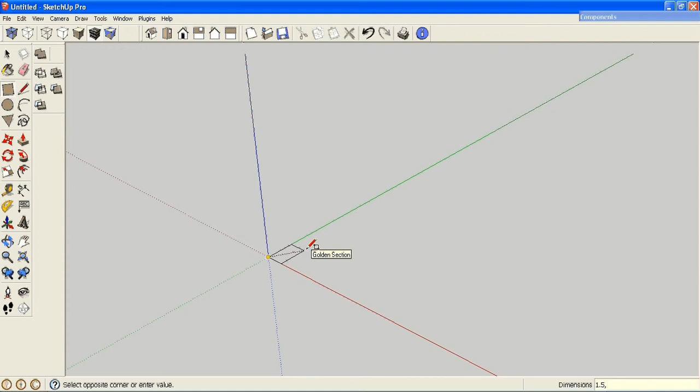So the first thing I want to do for this sensory table is create the legs. Now there are four legs. When I did this, I created this out of just spare 2x4s that I had laying around. So the first thing you want to do is create the leg. Now these are 18 inches in height by 3.5 by 1.5.

As you know, dimensional lumber is never exactly what it says. So a 2x4 is actually 1.5 by 3.5, or they call it 6/4 for 1.5 and 14/4 for 3.5. That's just, if you do it by quarter inches, it makes a whole lot more sense. So I created this 18-inch leg here.

The first thing I'm going to do is make this a component called a leg, so that anytime I want to change this component, all I have to do is change one of them and it changes all of them.

Next, I'm going to create a different leg. All you have to do is say move and then hit the control key. And I know that this one is going to be about 10 inches wide, so it should be 10 inches from here to there. So it's 8.5, so I know I need to move it the right dimension.

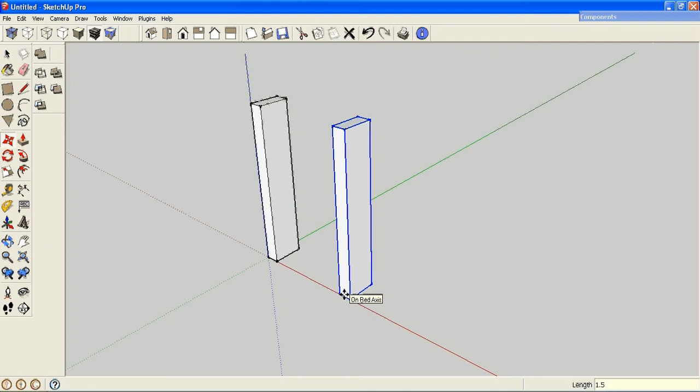So now it's 10.5. And then what I can do from there is take both of these legs and just move them out this way, hit control again. Now this will be 12.5 inches from that, and the dimensions I'm using for this I actually got from the water bucket or the sink bucket that I'm using to create this, and I just got it out of the kitchen sink. So I believe that's 7 inches.

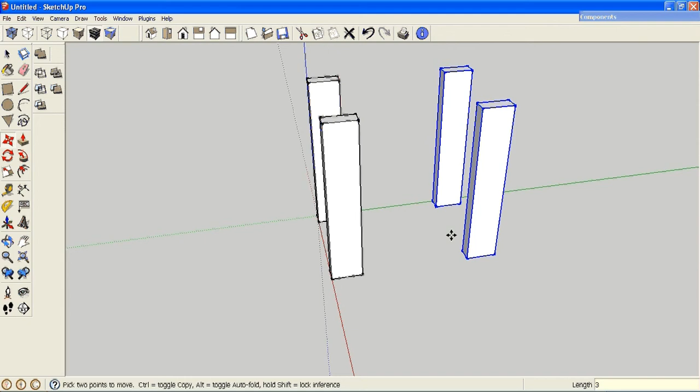Oh, that's wrong. I want that to be 6 inches. How far is that to there? Oh, I need another 3 inches. As you can see, that's pretty easy just to move it. So that should be 1.5 inches, and this is 10 inches.

Okay, and so there you have the four legs.

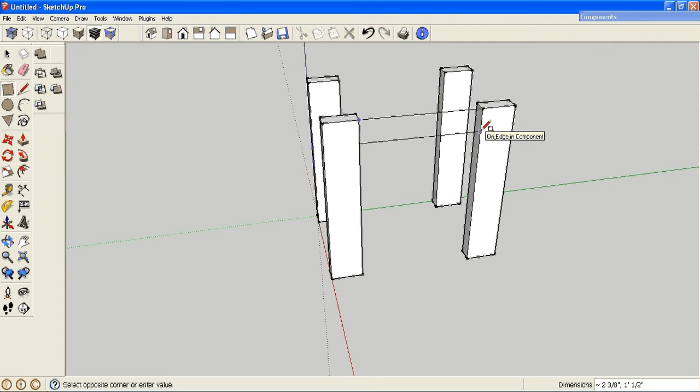Next, what I want to do is create the sides, and I know this needs to be 12.5 inches by 3.5 inches. So I'll create the rectangle, 12.5 by 3.5. You'll do 3.5 and then 12.5, and that will create that side of that leg. Use the push pull tool just to pull this straight in there, and then you have another side.

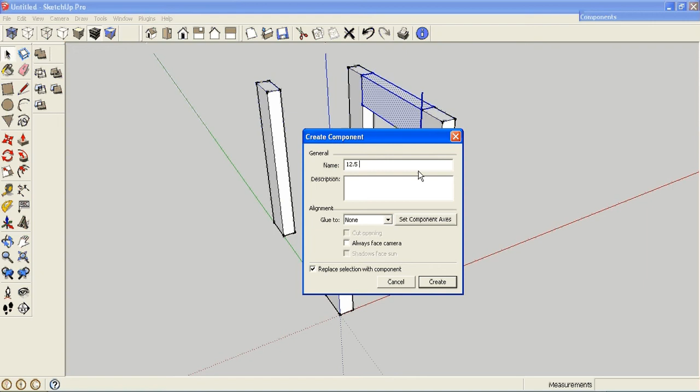So this one I'll call the 12.5 side. Then you can move this one over, just hitting the control key again, line it up, and it goes that way.

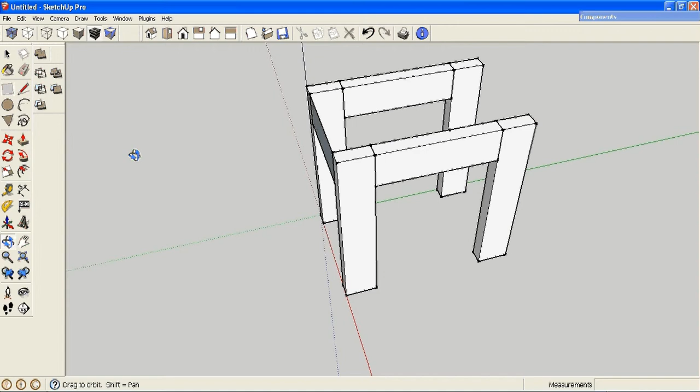Next, I want to create the sides for here, so that'll be 10 inches by 3.5 inches. Then this will stretch out 1.5 inches, or 6/4. So this one I'll make a component as well. That's the 10.5 side.

Good enough. And I'll do the same thing there. I'll just grab it from here so I can bring it all the way down. And that's basically all that you have to do.

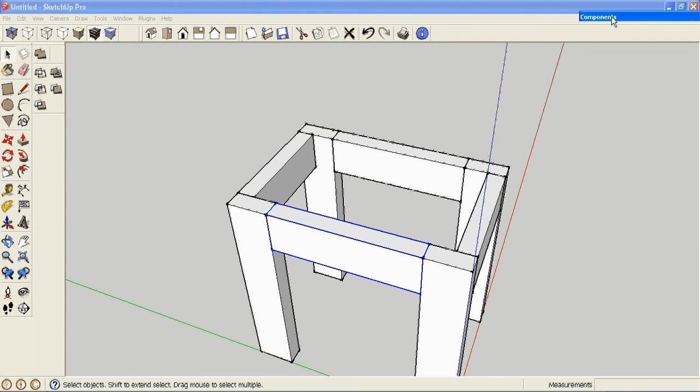Now I want to talk a little bit about the joinery in this. This is a pretty simple project; it's only 8 pieces of relatively short wood. The first time I did this, I did it with a pocket joinery system. You can also do mortise and tenon. You can just glue it. There's a wealth of things that you can do to do this. It just depends on how much money and how much time you want to put into it.

I find that the pocket jig system is just the easiest way to do it. I want to show you quickly how you can.

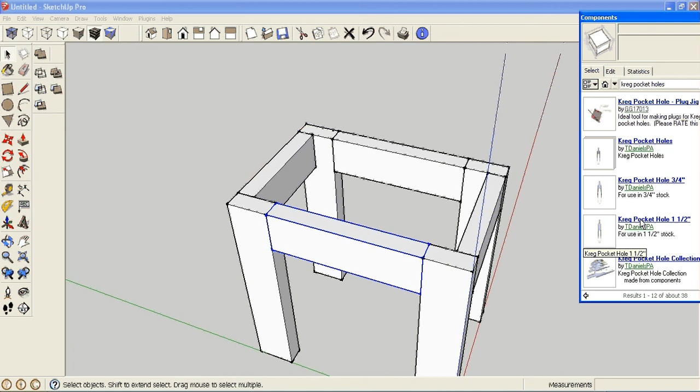So these are the pocket holes for 1.5 inch. You just click on it and it'll bring this up. You say download model directly into it, yes I do. And what you can do is just, if it'll cooperate, rotate this into the model the way that you want it, and move it wherever you want it.

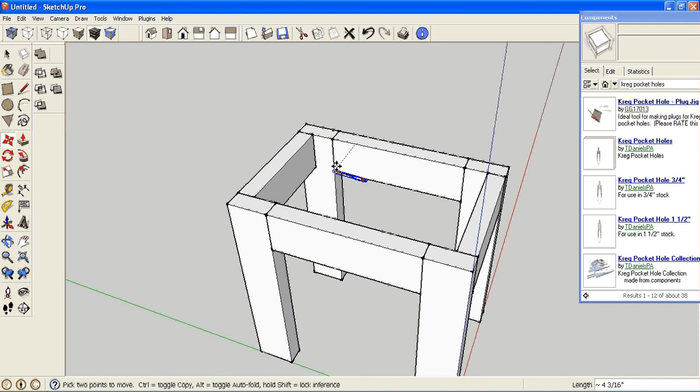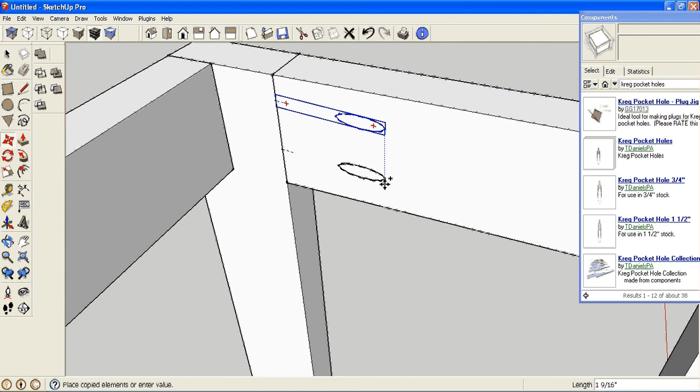So I'll just do one in the middle here and then move it. This is a 3.5 inch, so I know it's 1.75 inches, so I'll just move it up 1 inch, and that way it'll be 3/4 from the side. Then I can add another one to the bottom. You can just put it basically right—1.5 will be pretty much the same distance from there.

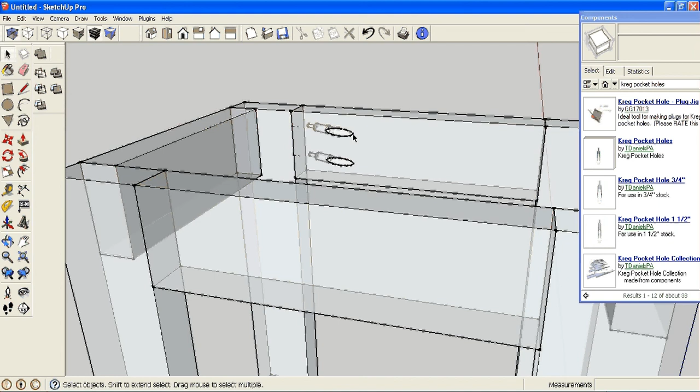And if you look at this through the wireframe in the upper left hand corner, you'll actually see how the pocket screw goes into there, and you can kind of understand how the pocket jig works. Then basically you just do that to all sides of it, put your bucket in the middle, and you have a sensory table. Kids can put anything they want to it.